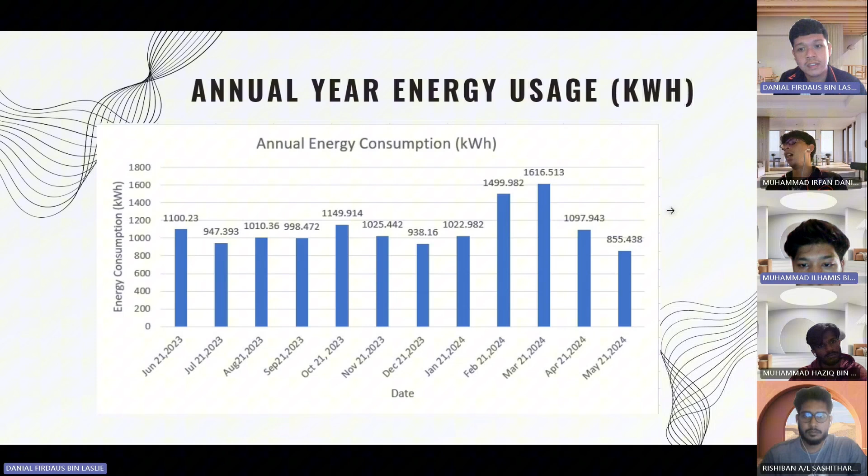For the minimum, we can see 21 May 2024, which is 855.438 kilowatt hour. Next.

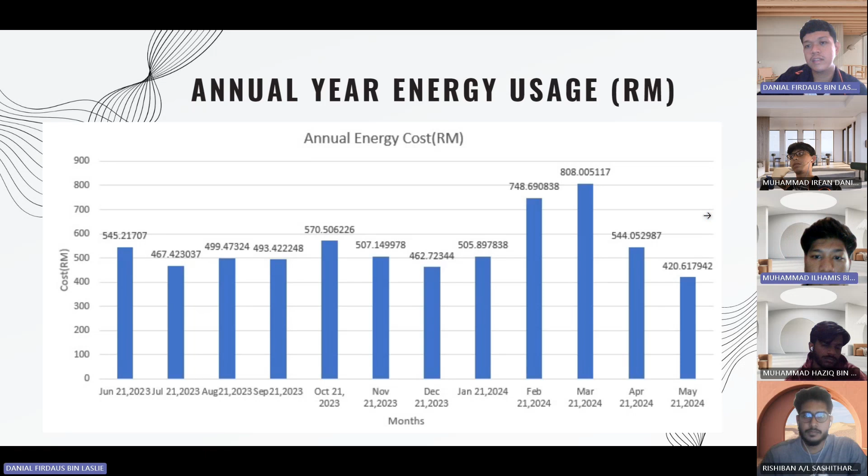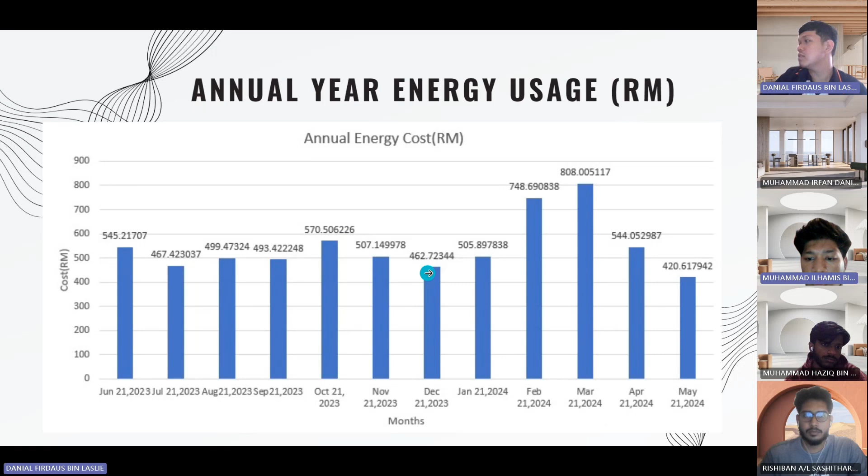For annual year energy usage in Ringgit Malaysia, the highest is also 21 March 2024, with a value of 808 Ringgit Malaysia, and the lowest is 420 Ringgit on 21 May 2024.

We pass to Rishi. I will present the monthly energy usage in kilowatt hours for the month of March 2024. The data starts from March 21st, 2024 up until April 20th, exactly one month.

Here is the data for energy consumption in kilowatt hours. The peak, or highest, energy usage is at April 7, which is 102.05 kilowatt hour, and the lowest is on April 13, 2024, at 20.777 kilowatt hour.

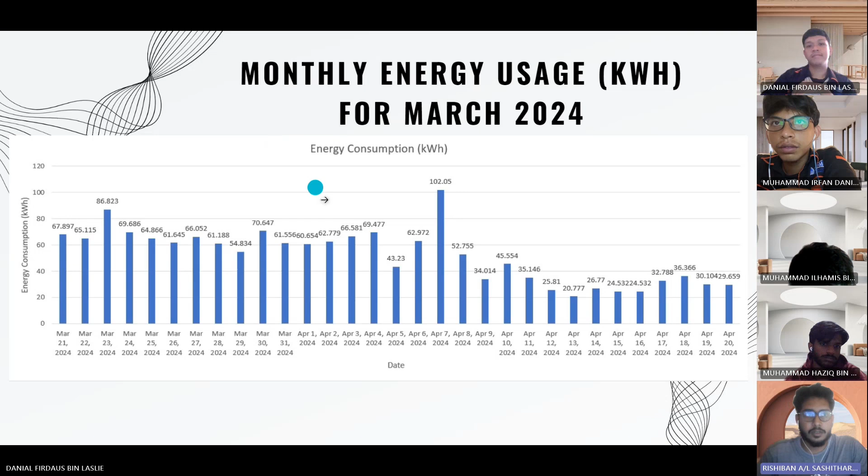Next slide please. This is for the same duration, but in terms of monthly energy cost in Ringgit Malaysia.

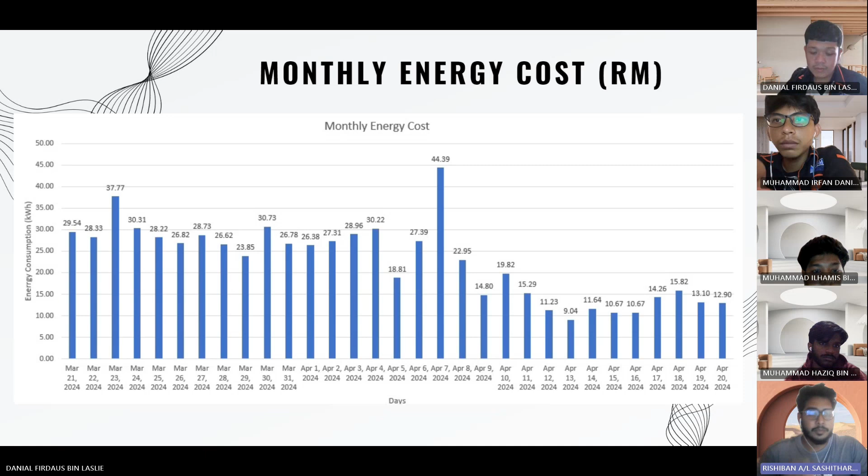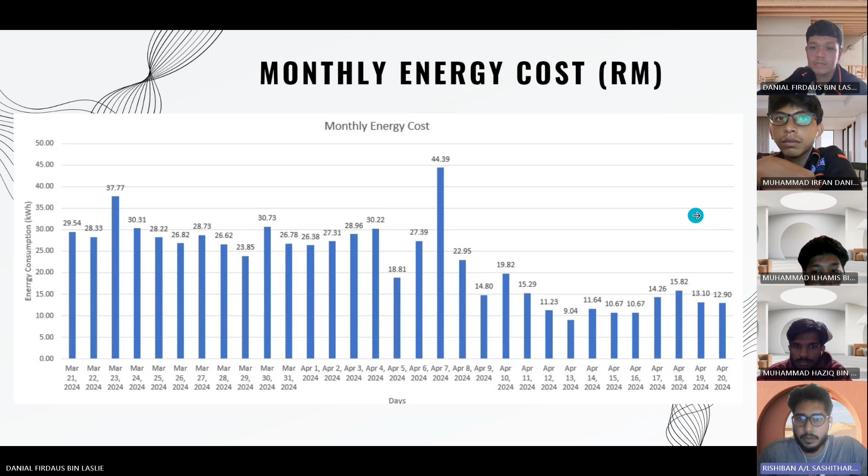The highest is also April 7, 2024, which is 44 ringgit 39 cents. The lowest is on the same date because lower kilowatt hour is cheaper and higher kilowatt hour is more expensive, so the lowest is April 13, 9 ringgit. Next slide please.

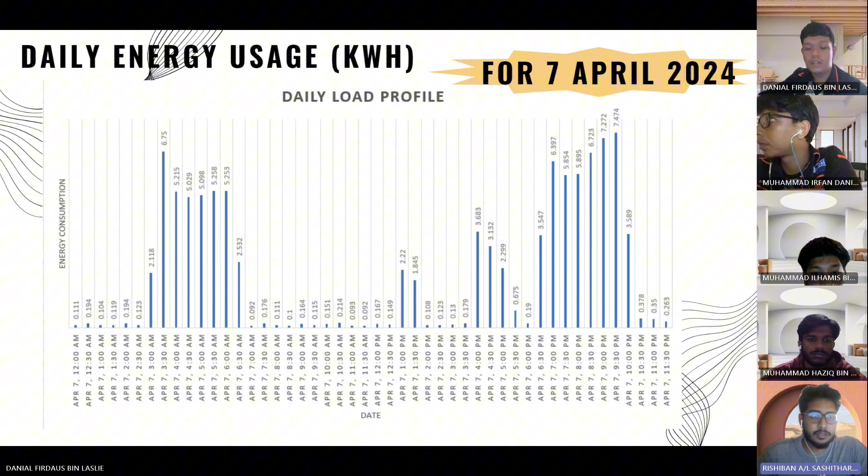Here we have the bar graph for daily energy usage in kilowatt hour, also known as the daily load profile, at 30 minute intervals on April 7th from 12 a.m. until 11:30 p.m. The highest load profile data is at April 7th, 9:30 p.m., which is 7.474.

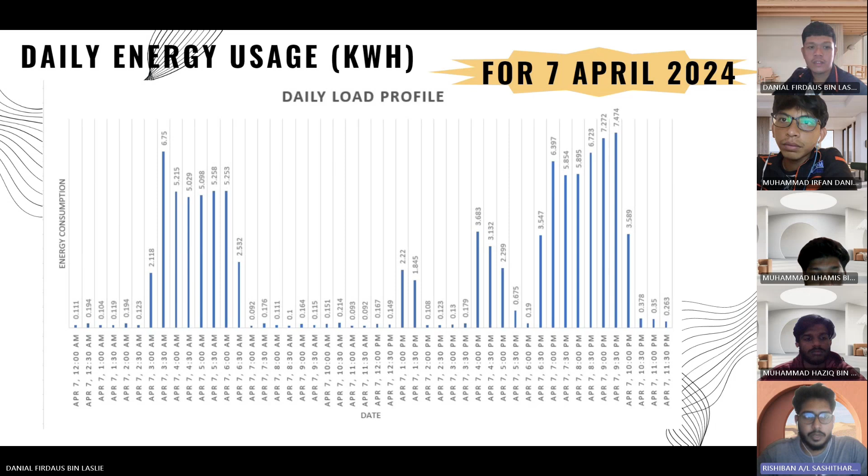There are many lows, but the lowest is at 11 a.m. April 7th, which is 0.093 kilowatt hour. Next slide.

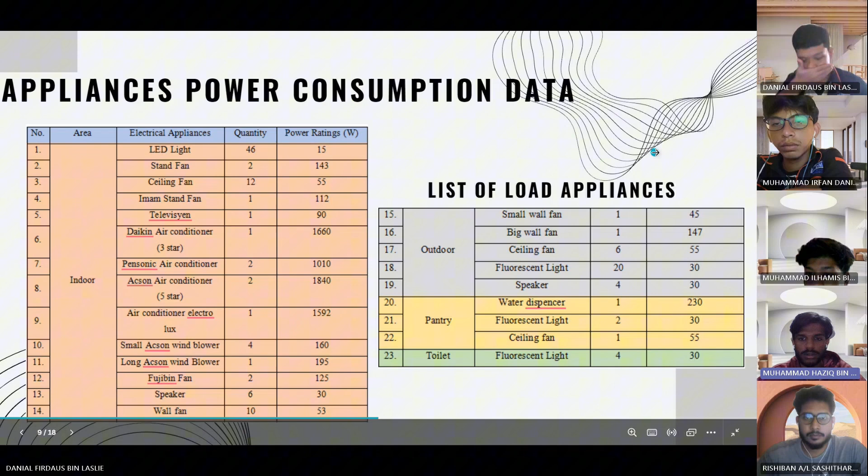For the next one is appliances power consumption data. For the indoor area, we have LED light, stand fan, ceiling fan, imam stand fan, television, air conditioner (4 types), wind blower (2 types), speaker, and wall fan. For outdoor, we have fan, light and speaker. For pantry, we have water dispenser, and for toilet, we have fluorescent light. These are the power ratings collected, and the quantity of each in each area.

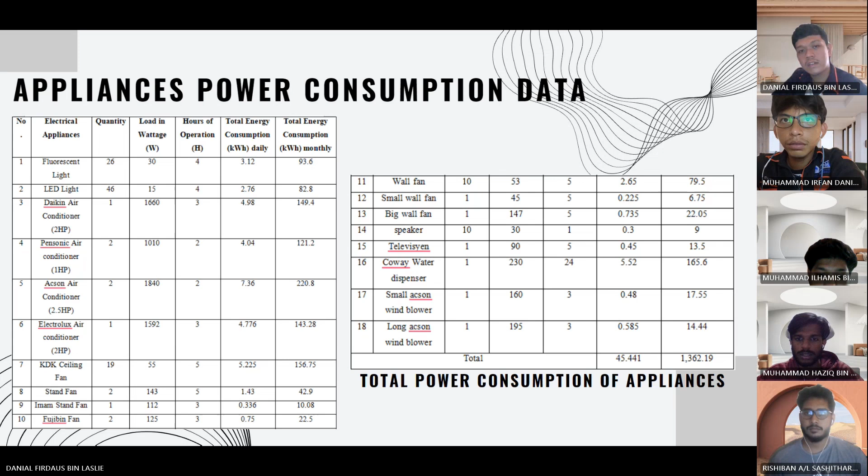Imam stand fan, we got 10.08. Fujibin fan, we got 22.5. Wall fan, we got 79.5. Small wall fan, we got 6.75. Big wall fan, we got 22.05. For speaker, we got 9. Television, we got 13.5. Coway water dispenser, 165.6. Wind blower is 17.55 and 14.44. Total consumption for monthly is 1362.19. So these are the total consumption for this month.

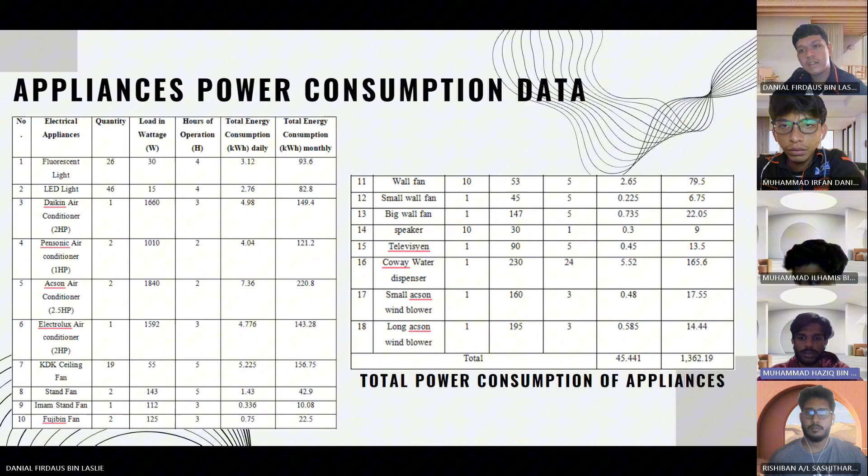So for the next one, I'll continue with Danial Laslie.

Okay, for room data survey analysis, we can see inside surau we get the illuminance, which is large. The average is 310. For outside it is 364.33, and for pantry it is 216.67, and toilet is 205.

And we look at the small table, within range plus minus 30%. Number of area is 3 and the percentage is 60. For overlit range, number of area is 2 and percentage is 40%. Underlit you get zero of all area, and of course 0%. So the total area is 5 and the total percentage is 100.

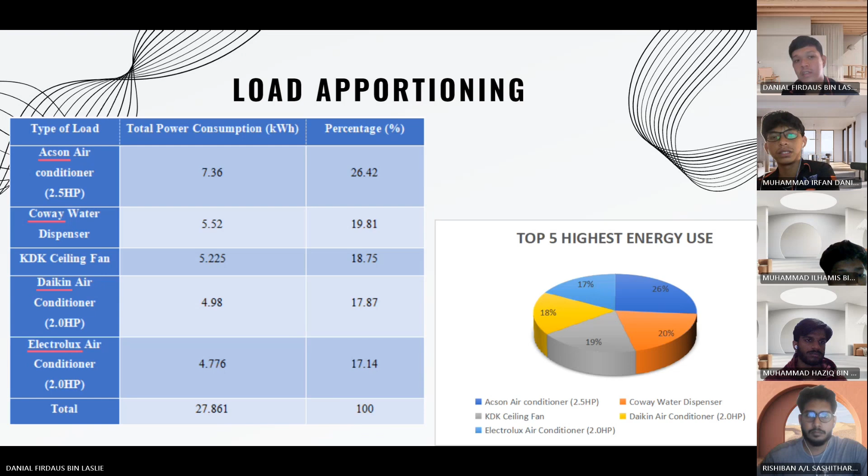For method one, I'm using reduce the air conditioner usage and preventing air leakage, which is Surau Al-Iman utilizes 6 air conditioner indoor and has different types of air conditioner, which is Daikin air conditioner, 2 Pensonic air conditioner, 2 Acson air conditioner, and Electrolux air conditioner.

From the load apportioning, you can see that air conditioner uses 73.43% of Surah Al-Iman energy consumption.

And then the thermostat setting that has been used for air conditioner is 22 degrees Celsius. But when room data survey has been conducted at Isha prayer time, the measured temperature is 23.5 degrees Celsius.

So from there, a proposal of potential saving has been put to manage the energy consumption in the prayer hall. What I want to do is reduce the air conditioner usage by using only 4 air conditioner during Fajar, Maghrib, and Isha prayer time, because occupancy at that time is not heavy, which I calculate is about only 30%.

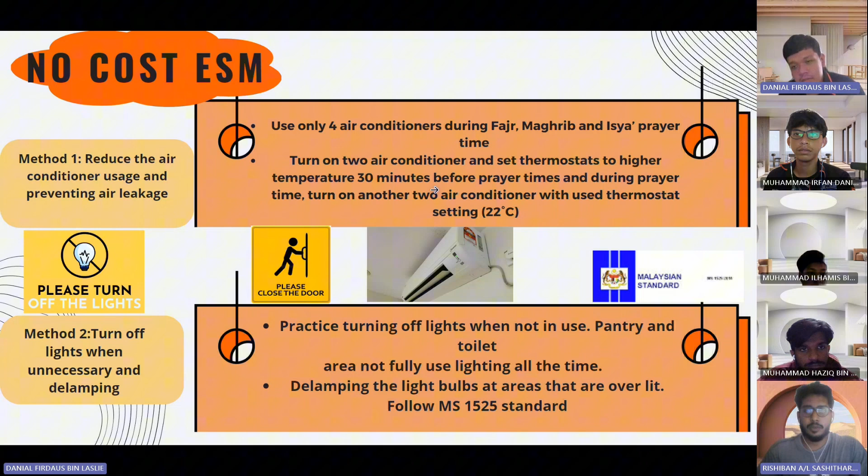However, the pantry and toilet are not always being used. That's why I propose turning off the lights in the pantry and toilet when not in use. According to my estimation and calculation, the pantry and toilet are only used half of the time, since the usage time is 4 hours. So half of the time meaning 2 hours plus minus.

Next is delamping. Delamping is the process of taking out certain bulbs at a certain area so that the area is less lit. The area we choose to delamp has to be an area which is overlit. It cannot be an area which is underlit or within range, because that will only make the whole area much more dimmer, and that will defeat the purpose.

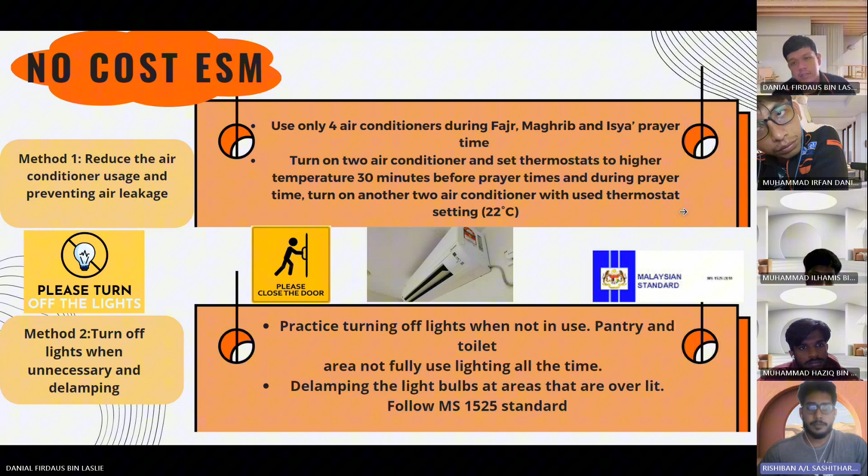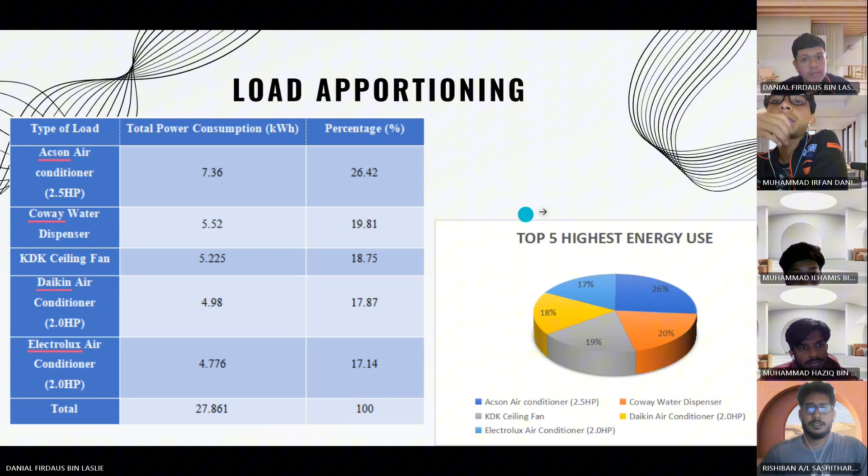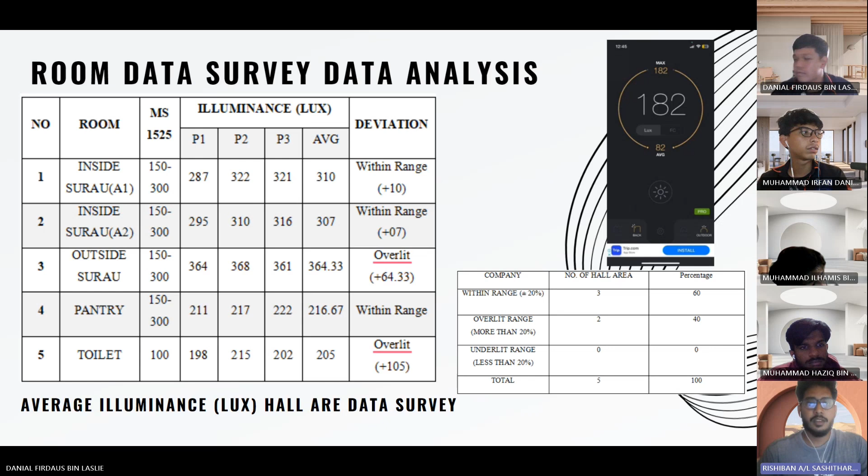As we can see from the room data analysis, the deviation of the lux level is all within range except for outside Surau and toilet. This is overlit. According to MS 1525 standard, outside Surau should be 150 to 300. But in this case, the average illuminance we got from 3 readings is 364.33, which is overlit. Similarly for the toilet, the overlit level is up to 105 illuminance level.

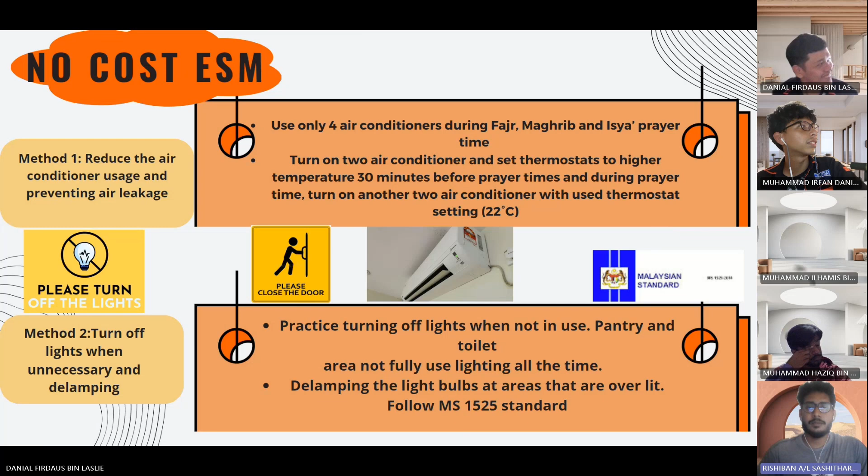That's why I chose to delamp the outside and the toilet area. Thank you.

For the medium cost measure, the first method is to replace fluorescent lamps with LED lamps. This is because changing the fluorescent light into LED light can be an effective energy strategy to reduce energy consumption and improve efficiency in the lighting system. As you can see, the Surau has 36 fluorescent lamps outside, so we change those to LED, which will save electricity for the users.

For method 2, we will install a programmable thermostat for the air conditioners. We have three air conditioners which have no programmable thermostat. We need to install that so we can manage and set a schedule based on the Surau's operating hours and occupancy pattern. From what I researched, we can save 10% of monthly energy consumption if we use the programmable thermostat, because we can set the time or control the temperature.

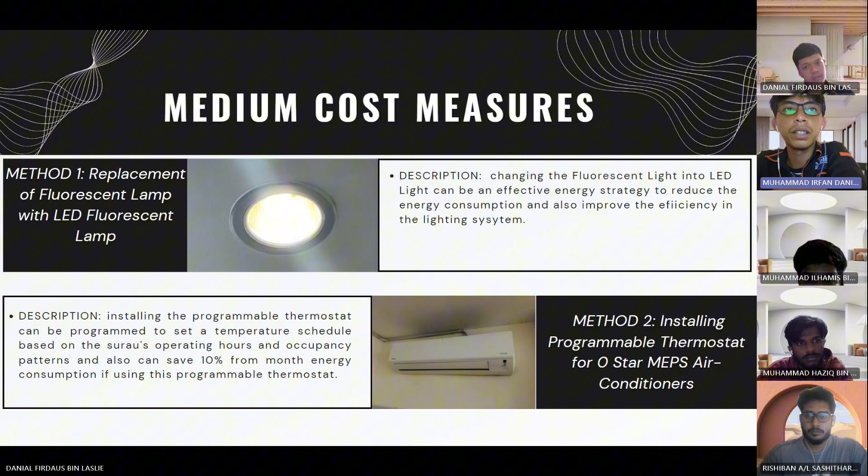By using this, we can reduce the energy consumption, but it will take a long time to get a simple payback period.

Okay, for high cost ESM, there are 3 types which we can edit through this high cost. First is using 5-star appliances. Second one is using a solar panel, and for the third one is rewiring.

So the easiest method I'm choosing is 5-star rating because the bill is not exceeding 1K. Although it's cheap, it can still save a few bucks on the electrical bill. So I'm suggesting the Surau change their air conditioner to a 5-star rating because the Surau is currently using an air conditioner with 2 horsepower with 3-star energy consumption and another 3 air conditioners with 0-star rating. So by changing it to 5-star rating,

inverter air conditioners offer better energy saving compared to non-inverter units. This is due to adjusting the compressor speed to maintain consistent cooling, unlike non-inverter air conditioners which operate at a single speed and can only maintain desired temperature by switching on and off.

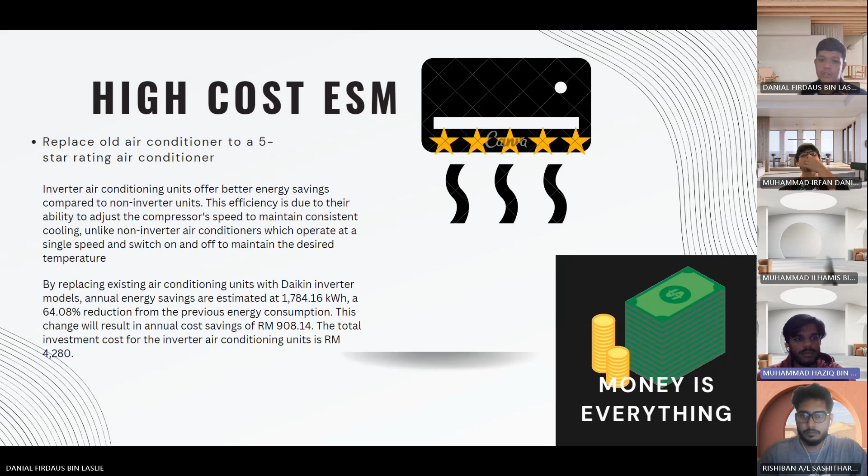So for the next one, from the conclusion of the energy audit, we can review the energy profile and trends through remedial energy conservation measures effectively, and we can invest in modern energy efficient technology to optimize energy use, which can reduce wasted energy consumption in the Surau.

So by conducting the energy audit for this Surau in Malaysia, we can promote efficient energy use, and we also can get economic benefits. So as you can see, my members presented their ECM, energy conservation measures for no cost, medium cost and high cost. So okay, let's go to the next slide.

So from what I can see, for the low cost, ECM1 we got a saving of 23.05% because our conservation saved by using the air conditioner wisely. So if we're smart in managing energy consumption using the aircon, we can actually get a big saving.

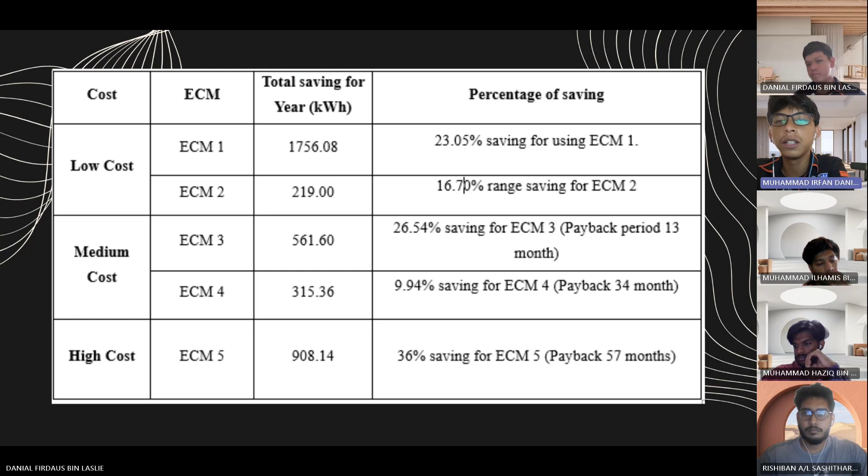So for high cost, you can see their payback needs to take 5 to 6 years, because they use higher cost methods like implementing solar and changing technology by using other measures.

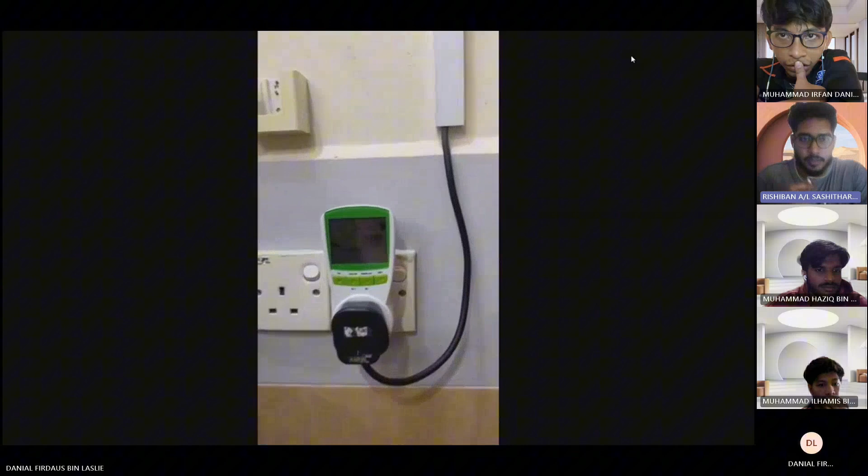Here we can see we are calculating the power rating for each of the appliances, using a socket meter to measure each socket's power rating. Right there, you can see 5.25 watts, that's for the fan if I'm not mistaken. Here we can also see how many amperes and how much current is shown. There's Danial Laslie.

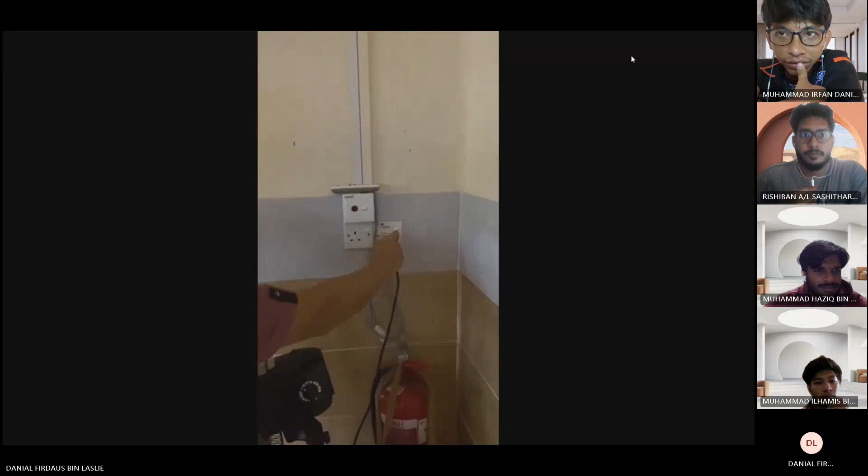Next we have Ilhamis, who is taking down notes. And I was recording. Muhammad Haziq and Irfan Daniel were checking the aircon and the blowers as well, because for those we can't use the socket meter, we have to check the rating instead. Here we are using the socket meter, so we plug it in, plug the device, and then turn it on.